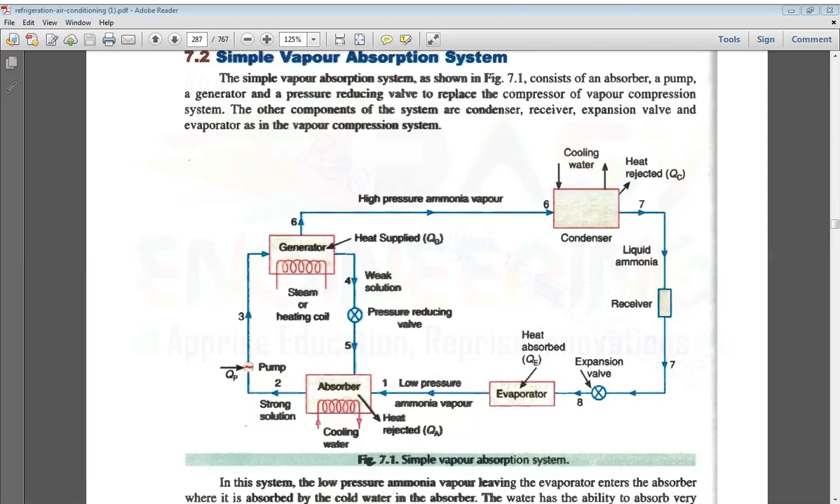The main function of the expansion device is to convert the high pressure and high temperature liquid into low pressure and low temperature liquid refrigerant, so that once again it enters into the evaporator and the cycle repeats.

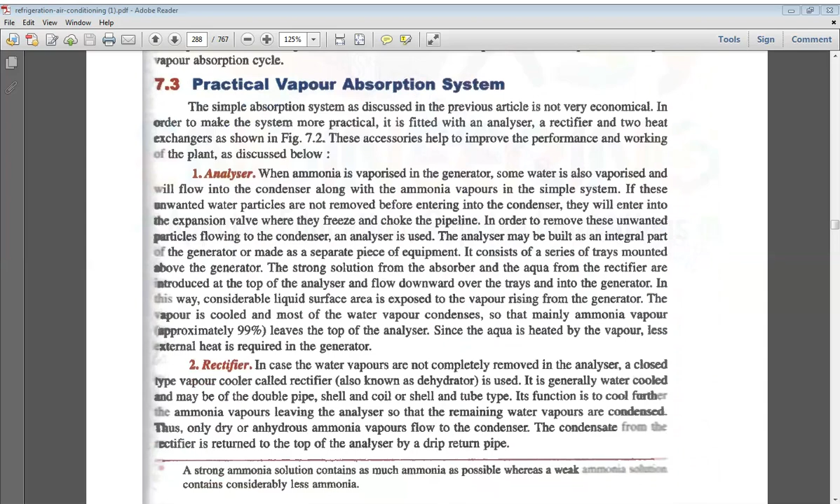That is the simple vapor absorption refrigeration system. Now let us observe the practical vapor absorption refrigeration system, which is, as usual, the same as the simple vapor absorption refrigeration system.

In this system, we add some new components: an analyzer, two more heat exchangers, and a rectifier.

The analyzer, which is an integral part of the generator or a separate part, is located at the top of the generator. This analyzer consists of a series of plates.

The main function of the analyzer is to eliminate the maximum amount of absorbent—that is, the water vapor that leaves from the generator. And the rectifier is essentially a dehydrator.

In this dehydrator, we are trying to complete maximum elimination of liquid, the absorbent. If we allow the absorbent to reach the condensation temperature, since the absorbent we use is water, at 0 degrees centigrade water is theoretically converted to ice, so that it blocks all the pipelines or chokes the pipelines. Considering this major disadvantage, we try to completely eliminate the absorbent portion in the rectifier itself.

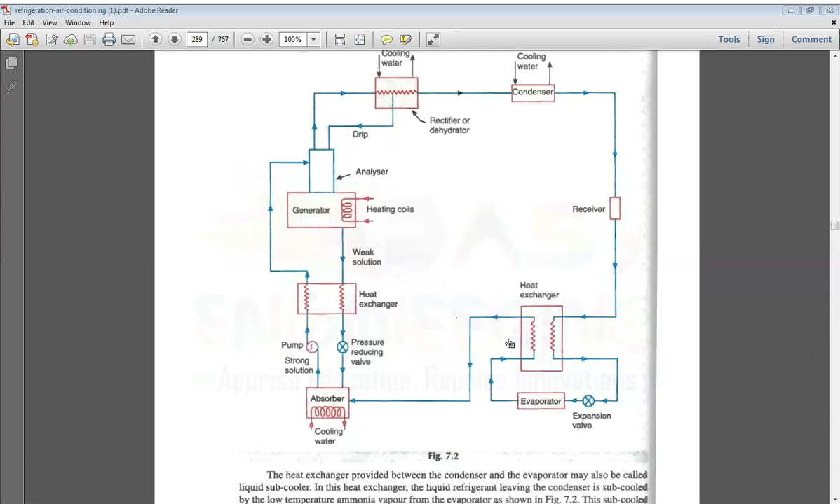In the case of the simple vapor absorption refrigeration system, the strong solution enters directly into the generator. But we place a heat exchanger, that is an ideal device. It absorbs the maximum heat energy from the hot weak solution, so that is one of the major advantages. It reduces the amount of heat given to the generator, and the cycle repeats as usual. So here we are focused not only on the cooling system. We mainly focus on the heat input to the generator, and maximum cooling effect.

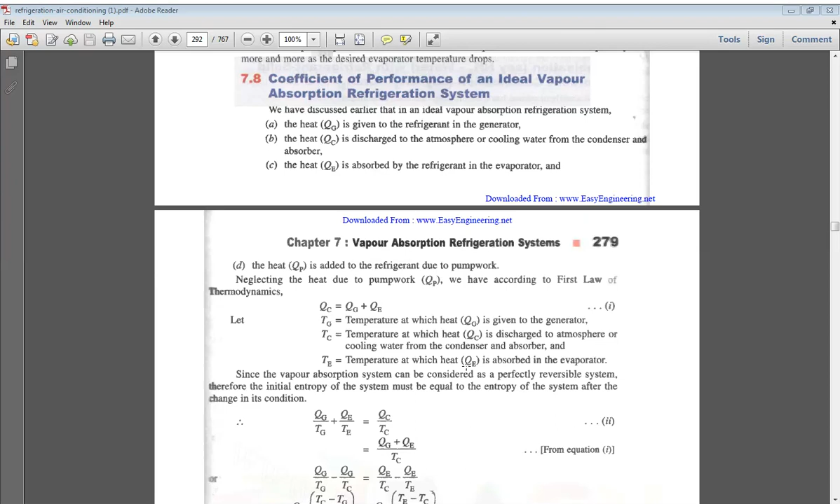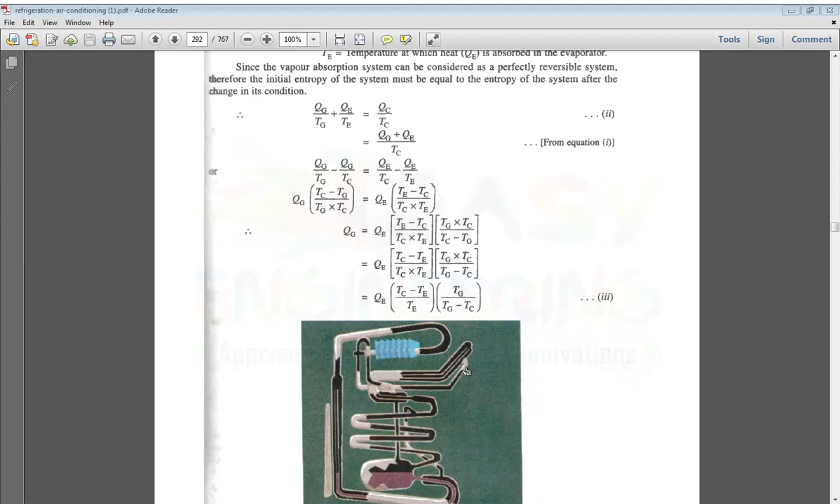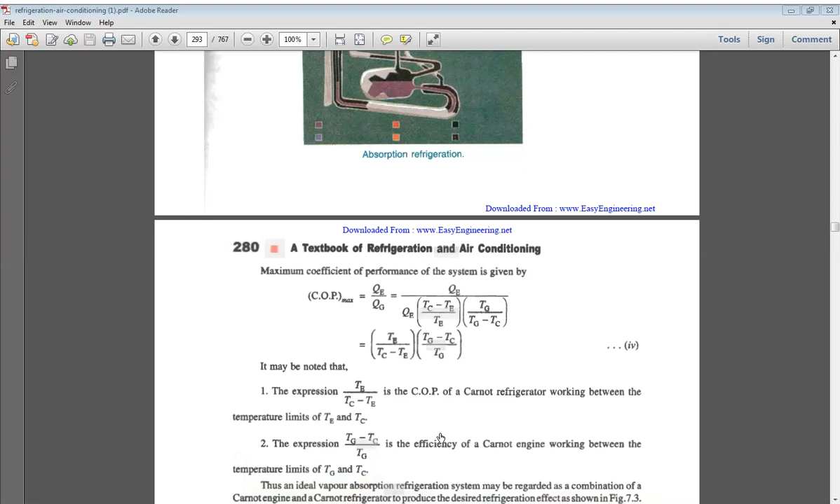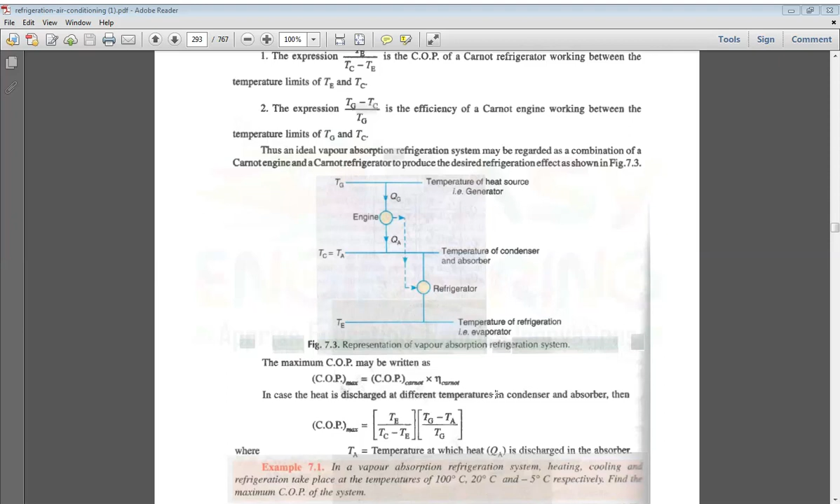The coefficient of performance of this vapor absorption refrigeration system is based on the heat values of the generator, QG, QE, and QC, and QE by QG. That is the simple equation based on thermal equilibrium; we try to simplify the equation. The COP of the vapor absorption refrigeration system depends upon all these considerations. That is, COP of vapor absorption refrigeration system is equal to COP of the Carnot cycle and efficiency of the Carnot cycle, considering temperature limits or heat values based on the generator, evaporator, and the condenser only.

So this is very simple, but with the consideration of all the things.